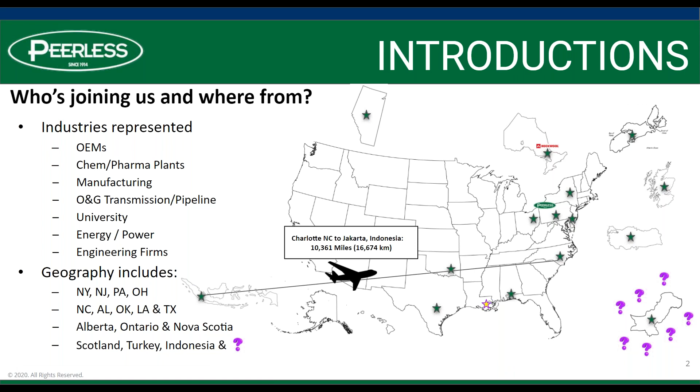Peerless has been around for over 100 years. That's our old building, downtown Buffalo. For years we operated out of a 5-story building. About 3.5 years ago we moved into the building on the lower right-hand corner, where it's much more efficient for us. We can operate far more leanly.

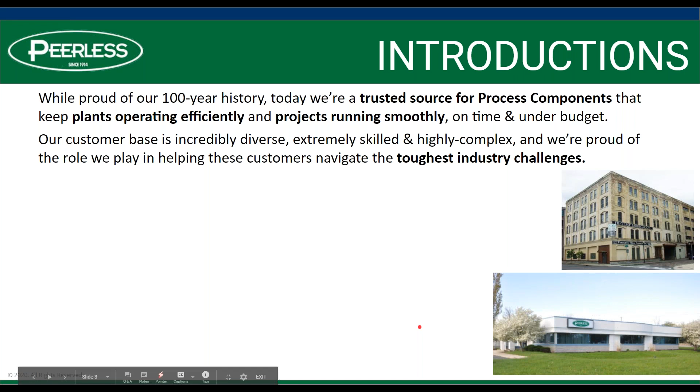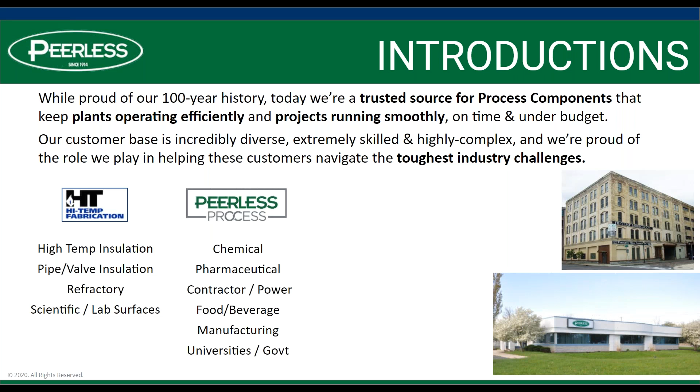We've become known as a relied upon distributor and manufacturer for process components. We operate out of 3 segments: our high temp fabrication group, where we do work with high temp insulation, pipe and valve insulation, refractory, and lab surfaces; our process group, which does a lot of MRO work for the chemical and pharmaceutical industries; and the OEM group, where we work on a lot of very high spec projects that end up global.

Today we have Dave Adamski with us. He is the specifications sales manager for North America for Rockwool. Dave, thanks for joining us. We also have Jonathan Osei-Kaffour, the regional marketing leader. On the Peerless side, you see some familiar faces: Dan Morgan, Greg Barrell, and of course, me.

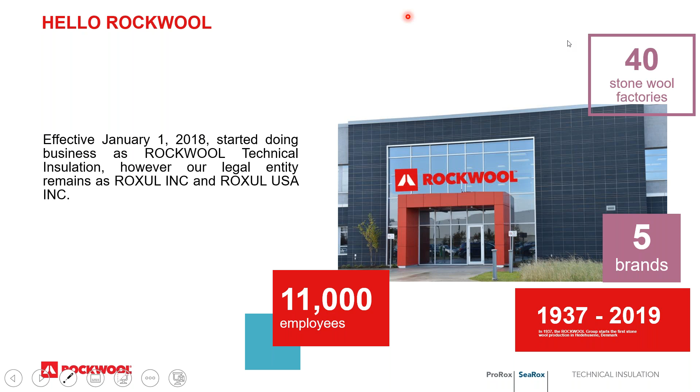Starting off with this slide, at a high level, Rockwool, as we are named today, wasn't always the case here in North America. We've transitioned from this name from Roxul in 2018 to align and bring cohesiveness with our global company in Denmark, the Rockwool Group. A bit of informational points regarding the Rockwool Group is that we employ a little over 11,000 people globally, and we have 40 factories globally as well that serve 5 different brands across multiple industries, all using the power of stone as the critical raw material. The company started in the 1930s in Denmark, which is still the home of our headquarters today.

If you can go back to the slide before regarding North America. In North America specifically, we have 6 factories. Our newest one is being constructed in Ranson, West Virginia, and is set to be online in 2020. Grand Forks is the factory where we produce most of our Mandrel wound pipe sections with WR Tech, which Dave will cover a little bit more in his presentation today. Going to the next slide.

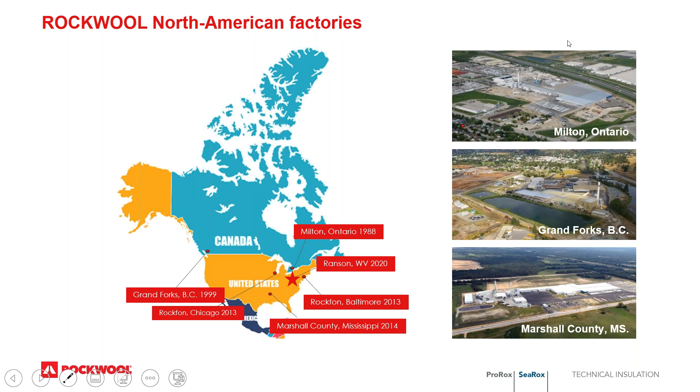So Rockwool Technical Insulation, we joined the Rockwool Group in 2004 to focus a little bit more on the industrial side of the business. So we're a bit smaller, but a focused segment that focuses on the business of process and marine and offshore.

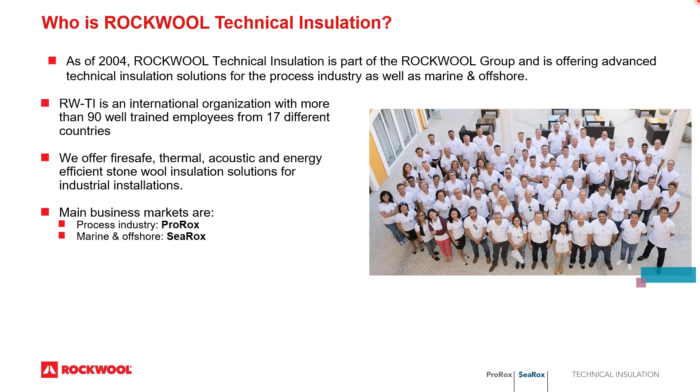If you go to the next slide, I just want to talk a little bit about why to choose Rockwool. We like to showcase this slide specifically to just show the landscape of our customers that we work with, from global owners to global engineering, procurement, and construction companies. So we've worked with pretty much everyone. We're a tried and true company, and we've been here for a while and have a proven track record.

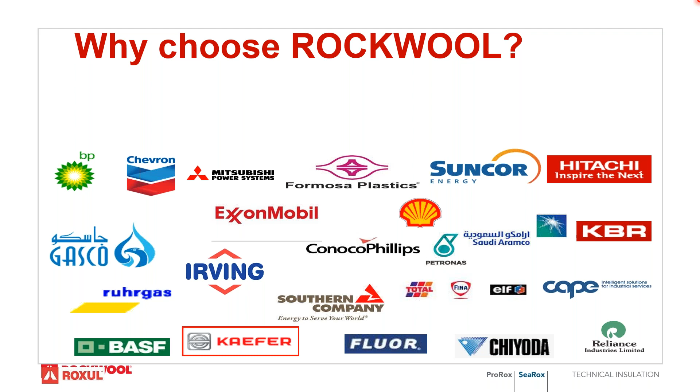Today's presentation is about reducing total cost of ownership with a focus on CUI, as it can be a big part of maintenance budgets. First, we'll talk briefly about why insulate at all. Then we'll go over CUI, or corrosion under insulation, but forevermore you'll know it as CUI, and some methods on controlling this form of corrosion. We'll review what to look for in choosing an insulation. Also, we'll look at some tools outside of the insulation that can help manage water ingress and egress. Finally, we'll wrap up with some valuable resources you may not be familiar with for developing your own maintenance and inspection programs. So, total cost of ownership.

When we talk about total cost of ownership, the expenditures can be grouped into 2 main categories, CapEx and OpEx. CapEx being capital expenditures and OpEx being operational expenditures. Most owners are well aware of the CapEx costs associated with design and installation. However, with OpEx, costs are more complex and they're just oftentimes harder to decipher.

We have energy utilization, impact on production rates, there's carbon dioxide emissions people have to worry about now, waste, and then of course, corrosion under insulation. We've been hearing from a lot of owners that a big portion of maintenance budget is dedicated to CUI. It can represent up to 40% of their costs.

So we recognize that CUI is a large piece of the total cost of ownership puzzle, and this is why we want to focus on unpacking what is CUI and some methods that are currently being used to deal with corrosion. Our aim is to offer some light and suggestions on what owners can do in the design and installation phase that will hopefully reduce some of those maintenance costs down the road.

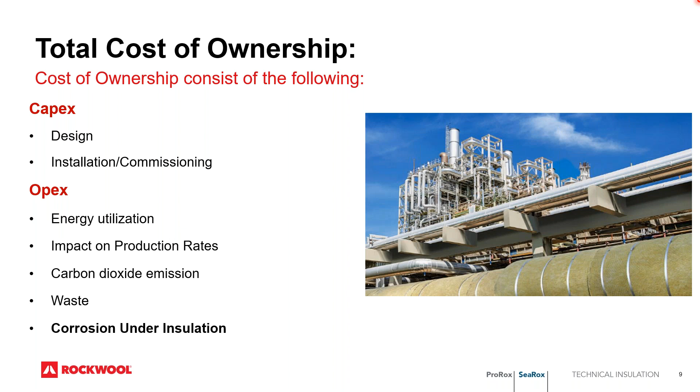Before we get into it though, let's look at why insulation is necessary in the first place. Most owners and engineers are well aware, but since the audience is wide and at different levels of understanding, I just wanted to answer the easy question first. Why do we insulate? So why not just simply get rid of insulation if you're having a corrosion under insulation problem? We'll look at a few ways to answer this in the next few slides. But the first way I'd like to answer this would be to look at an example.

Let's look at refineries in Europe. Approximately 5 to 10% are either poorly insulated or not insulated at all, which results in heat losses corresponding to, this is a lot, 150,000 barrels of oil per day. And if we just take a cost of even $40 per barrel, that translates into $2.2 billion a year of loss. These losses could be prevented with a simple investment of $600 million.

And you know what? That gives you a payback period of less than 3.3 months. So with an investment of $600 million, you can save $2.2 billion. That's a pretty serious return on investment. So again, why insulate? Because it simply pays to insulate. The savings are hard to ignore. In the next slide, we have an interesting case study of where an owner chose to remove the insulation, but it didn't turn out the way they had planned.

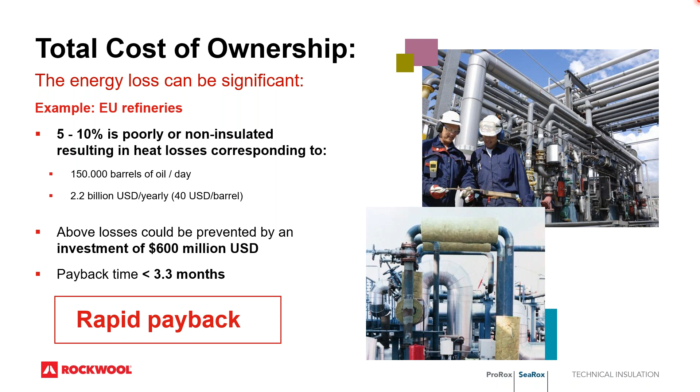So here's the situation. Removing insulation to mitigate corrosion under insulation is not the way to go. So we have a storage tank. They removed the insulation, then they coated it with an insulative paint, 7 layers. Total thickness, approximately 3.5 millimeters thick, which, sorry about that, that's about 1/8 inch. Tank diameter is 12.5 meters, height is 16.5 meters.

The heat loss from the tank wall, and it's tank wall only, so we're not even factoring in the heat loss from the roof. And then using the 80% filling degree, tanks filled to approximately 80% of their capacity for expansion, we end up with 330 kilowatt hours. The annual heat loss, well, you run the plant for 6,000 hours, you're at 2 million kilowatt hours. At 0.06, this is in euros, you're dealing with 120,000 euros per year of loss. This is what's going on because of the cost of heat.

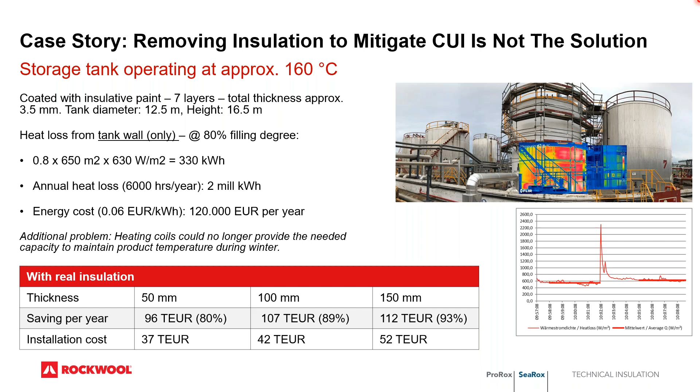Well, if we insulate, even if we put 2 inches or 50 millimeters, the savings are 96,000 euros, or 80% of the 120,000 euros per year. The installation cost of that is approximately 37,000 euros. Or if you go to the other extreme, you go to 150 millimeters, approximately 6 inches. The savings are 112,000 euros with an installation cost of 52,000. So again, as we said in the earlier slide, it pays to insulate. It saves us considerable money in our facilities.

The case study demonstrates how a simple solution such as insulation can have a dramatic effect on the cost of ownership. Here are some other reasons why owners come to us. They ask us to help them with issues related to, of course, cost of heating, process control, frost protection, CO2 emissions. Then there's safety. We got fire protection, we got personnel protection, and then acoustics related to noise control.

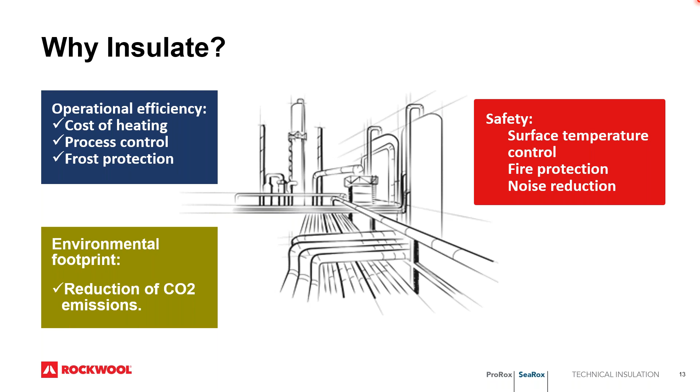Insulation checks off all these boxes. It's quite versatile and can fit so many ways of helping control the cost of ownership. So our topic is corrosion under insulation, and as said, you will now always know this term CUI. Insulation has a lot to offer, but with that comes specific challenges, namely CUI. In this next section, we'll go through some stats and some facts about corrosion.

A study done by Exxon estimated that 83% of CUI incidents happen on pipelines. Aging facilities are affected by erosion, corrosion, and fatigue. Up to 50% of the safety hazards are caused by pipe leakages or ruptures. Damaged insulation not only poses a risk for CUI as it's a source for water intrusion, but the heat losses can lead to major loss in efficiency and money. You may be already aware of this stat, but NACE did a study in 2016 that pegs the global cost of corrosion to $2.5 trillion per year.

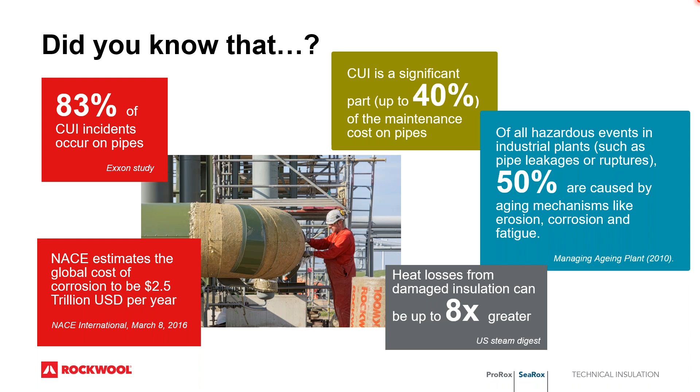So what exactly is CUI? Well, if I could be really simple about it, I'd just tell you it's rust. It's caused when water intrudes into the system and gets trapped between the insulation and the unprotected surface of the pipe. Rust is an oversimplification, but for visual purposes, if you can understand rust on a metal surface, you're on your way to understanding corrosion under insulation. And of course, water and moisture come from a variety of sources, whether it be rain, condensation, washdowns, maybe you're cleaning up the area, and then of course, just simple leaks or spills in the process.

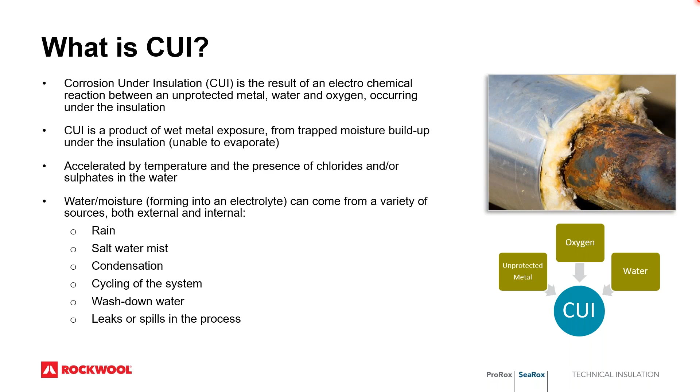And of course, accelerated risk areas are any facilities that happen to be near coastal areas, because salt water helps accelerate the corrosion, or high humidity areas. And of course, as mentioned, if you happen to have a cycling facility, that puts us into a new extreme as far as what we need to concern ourselves with corrosion under insulation.

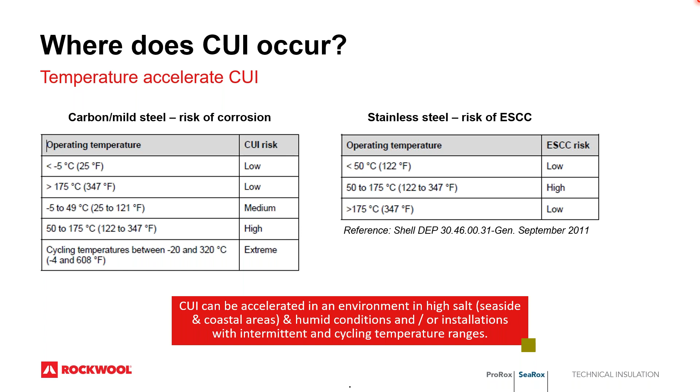So CUI is a challenge for sure. There's many factors involved. You got to consider the surrounding environment for sure, not to mention just what is my plant actually doing. There's the equipment and the system design. Then of course, choice and installation of the coatings that you would maybe put on the surfaces of your pipes, definitely the insulation. And then as a protective area, you got jacketing and cladding to consider. Then finally, you really got to look at inspection and maintenance so that you can spot where some vulnerabilities may be.

It's a costly problem due to more frequent repairs. So when you're looking at CUI and you're looking at your maintenance budget, these things all contribute very quickly to the cost of the maintenance of the plant. And then when it comes to your safety program, CUI, when we talked about ruptures and spills, of course, that can add to personnel problems where people can get hurt quickly. It can put you at risk of fire, and not to mention just simply pollute the surrounding environment.

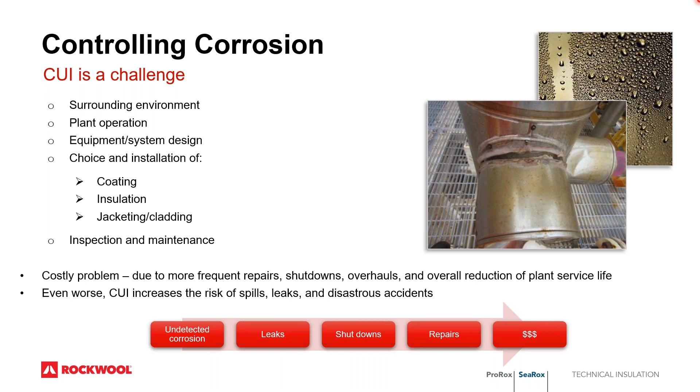With the equipment design features, with a lot of engineering here, we can do things that can help physically manage for reducing CUI. So of course, in doing your equipment designs, we look for things such as areas where water can be trapped, or make sure we have smooth surfaces for water to quickly shed. And then, of course, you design your systems so that we can literally prevent water getting into the system at all.

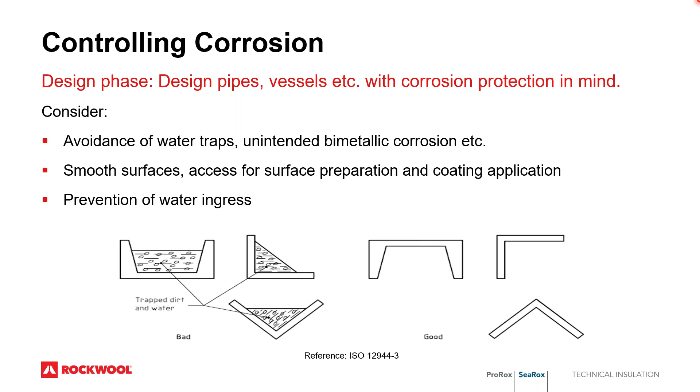Material selection and installation. Properly designed and installed jacketing, cladding system, that's your first line of defense. Use of suitable coatings on the system for pipe surface protection. And we will get further into these as this presentation goes on. So if any questions are starting to rise in your head, I'm hopefully going to address them as we proceed here. And then, of course, choosing an insulation material is very important. It has to have corrosion reduction characteristics.

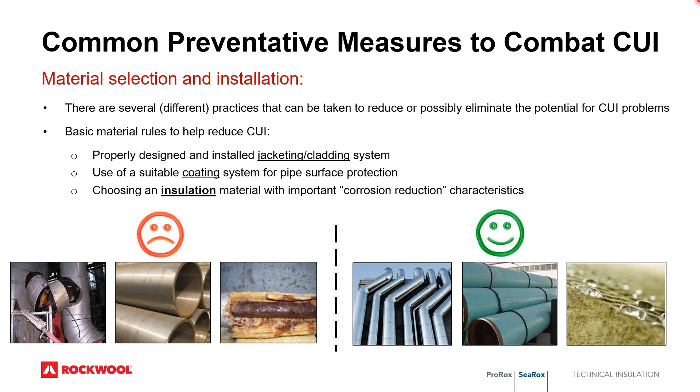And like most facilities or any process situation, quality control is paramount to ensuring that all things are working together to prevent the single problem you're trying to prevent, and in this case, it's corrosion under insulation. So QA programs will help monitor the whole process.

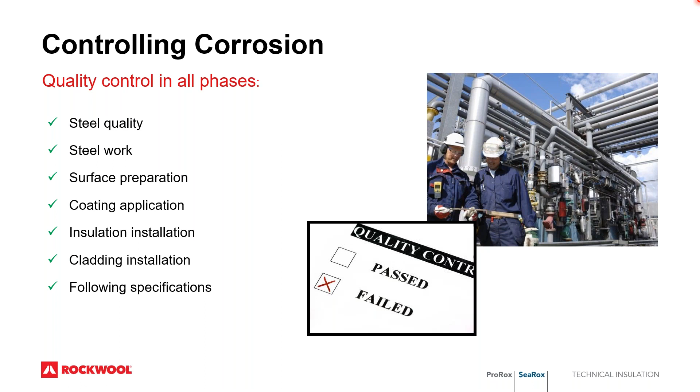Then throughout the QA process, you can come up with inspection and test plans, and proper equipment care, so that with inspection and test plans you can come up with prompt and effective maintenance. You can assess risk-based inspection procedures, and then with proper safety protocols in place for care of equipment, you avoid the foot traffic and any other unnecessary activities that may damage the system.

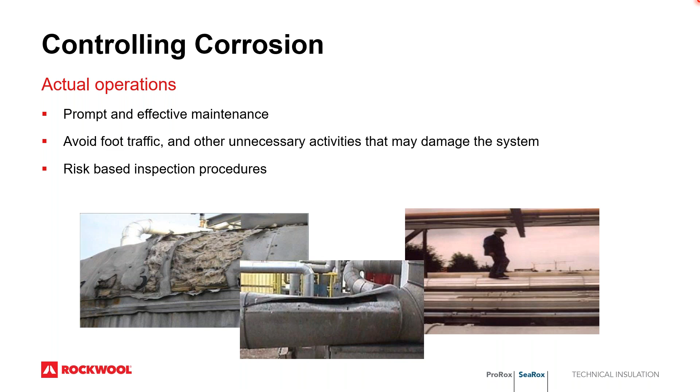So then you've got choice of coating. Now, this particular chart you see in front of you references the NACE SP0198 2016. And when I speak of coatings, I'm talking about an actual coating that goes on the surface of the pipe steel or tank, as you see in the pictures, that allows for protection against sitting moisture on the surface. This puts a barrier between sitting moisture and the actual metallic surface.

So NACE has outlined specific procedures for dealing with surfaces at various temperatures to help mitigate the corrosion situation that we often face in these facilities. So of course, your coating system should be suitable for the operational temperatures, so you've got to check your coatings. Surface preparation is critical. And then of course, once it's all coated, you do have to avoid damage of the coating after application. So all these things can be factored into an inspection and test plan in relation to controlling CUI.

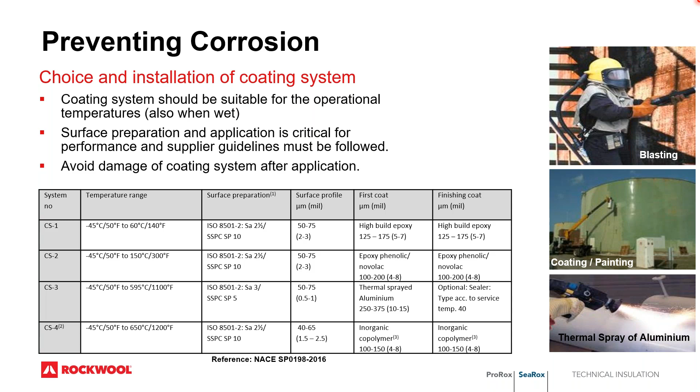So what about the insulation material? Rockwool has done a lot of research based on what NACE says in their CUI guide, and I'll do my best to give you a high-level summary of our findings. The full findings for this are available in white papers on the NACE website. So the insulation material. As a major insulation manufacturer, Rockwool, we recognize that we have a role to play in the CUI issue, and we're in a unique position to help solve the problem.

It's an industry problem because CUI is not unique to stone wool. Corrosion under insulation of carbon and stainless steel is possible under all types of insulation. The most influential characteristics of insulation are water repellency, permeability, as well as water leachable salts, such as chlorides or sulfates, and other acidic elements that can accelerate corrosion.

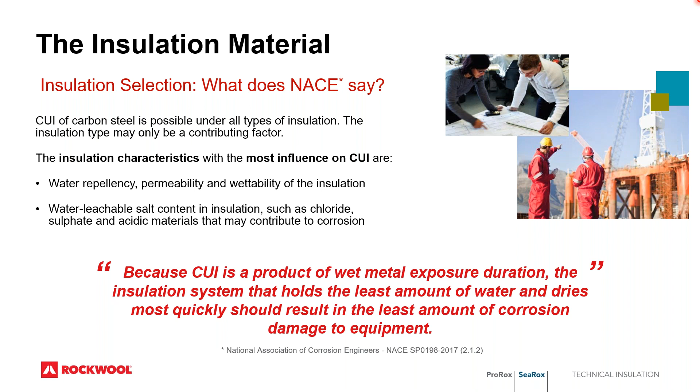This is best summed up in a statement within NACE's SP0198 guide on CUI. And it reads: because CUI is a product of wet metal exposure duration, the insulation system that holds the least amount of water and dries most quickly should result in the least amount of corrosion damage to the equipment. So what NACE is basically saying here is reduce time of wetness and you should reduce corrosion.

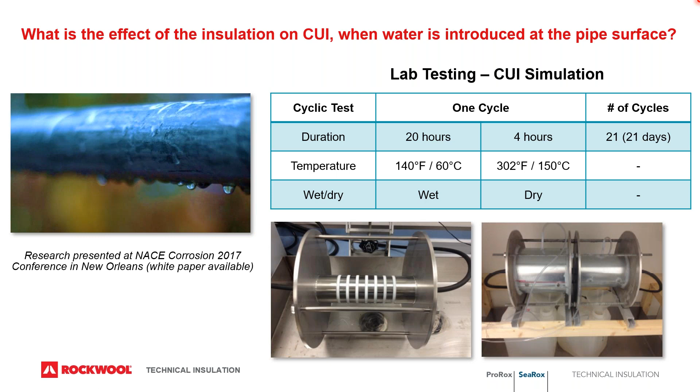The test rig is exposed to a wet and dry cycle. You get 20 hours of wet, and then we allow for a 4-hour dry. We did this for 21 days to find out what would happen. And so here are some of our key findings as we look at these images of corrosion on the top and bottom sides of the pipe. The insulations that leached out higher levels of chloride and sulfate resulted in more corrosion.

Larger areas of corrosion are found under closed cell insulations versus open cell insulations. That'd be a good question for someone if you don't know the difference between closed cell and open cell. This directly corresponds to NACE's statement on drying out the fastest. With closed cell materials like PIR and cellular glass, water had a hard time escaping, whereas open cell material allowed for that vapor to escape from the pipe surface through the insulation, thus lowering the time of wetness.

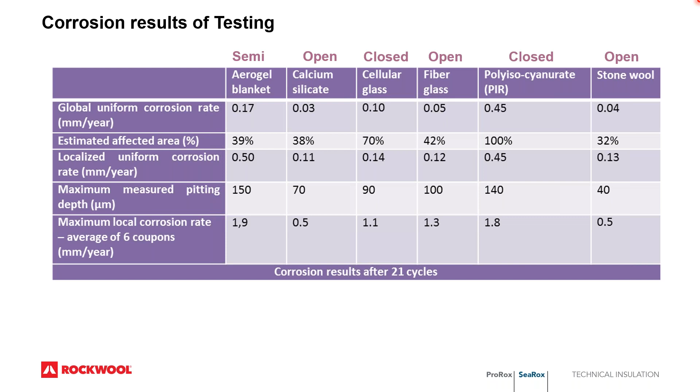This test and these results are detailed in a white paper we presented back in 2017, known as paper number 8877, titled Cyclic CUI Testing of Insulating Materials, for those of you interested in digging into this further. For NACE members, this paper is available and free to download. So for the person who asked that question, if I was not clear, please ask it again so I can review it one more time.

So what do tests show? Corrosion is directly related to time of wetness. Less water and faster dry out equal less corrosion. The ASTM G189 testing and results presented in the previous slides looked at the drying out time part of the equation.

The ASTM test is similar, but it's actually designed for flat specimens, so that's fundamentally the difference between the two tests. The EN standard is specifically designed for pipe-shaped insulation, whereas the ASTM standard is designed for flat insulation. In the ASTM standard, we submerged it to a depth of about 1 inch for 2 hours, and measured the water absorption at a recovery time of 2 hours and 48 hours after wetting, to see how fast the insulation recovered.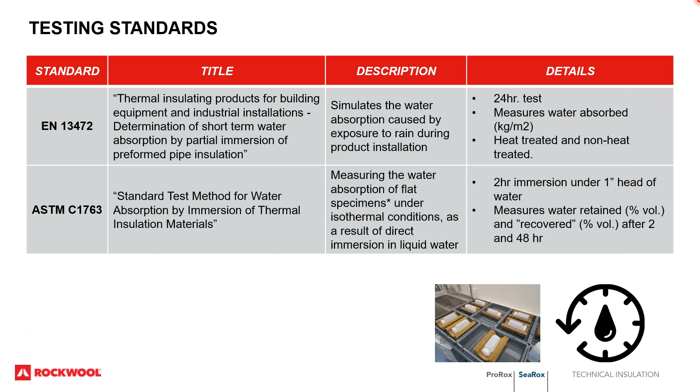You may be wondering how this test differs from the previous G189 test. Well, this test only looks at water absorption into the materials, whereas the G189 test looked at water escaping. So that's, again, back to the closed cell versus open cell comparison. With the G189, we can see how fast water could escape through the different cellular structures of the insulation.

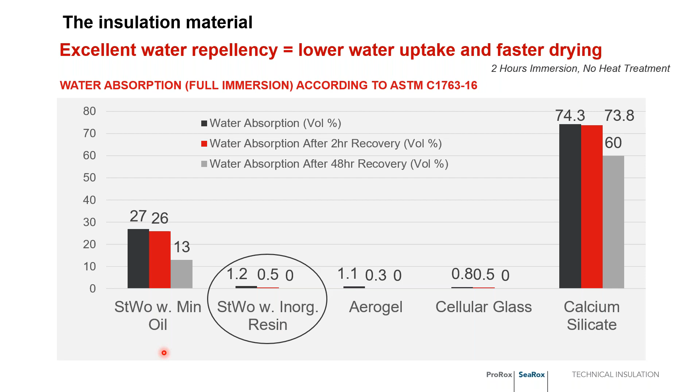So once again, another key aspect of keeping water out is the thermal durability of your water repellent treatment. Inorganic resin versus mineral oil are called water repellent treatments. This graph details results of stone wool and other insulation materials before and after heat treatment. By heat treatment, we simply mean the insulation was put into service and had to perform thermally at a temperature, and we wanted to see the result of the added water repellent treatment.

We did this treatment at 250 degrees Celsius for 24 hours. The reason for that is we're really interested in how the material performs in applications where the CUI risk is high, and remembering from the earlier slides, that's the zone between 50 and 175 degrees Celsius. For this comparison, we used the EN 13472 test, which is a partial submersion test of our insulation for 24 hours. That's meant to simulate short-term water exposure like a rain event, and water absorption is measured in the weight of water per submerged area, kilograms per meter squared.

As you can see, stone wool treated with inorganic resin performed well with less than 0.2 kilograms per meter squared before and after heat treatment, similar to perlite, which also had a low amount of water absorbed. But as you will notice, stone wool treated with mineral oil did not perform so well after heat treatment. When it was put into service and heated up, it began to hold the water. Calcium silicate was not so great in water absorption before or after the heat treatment test.

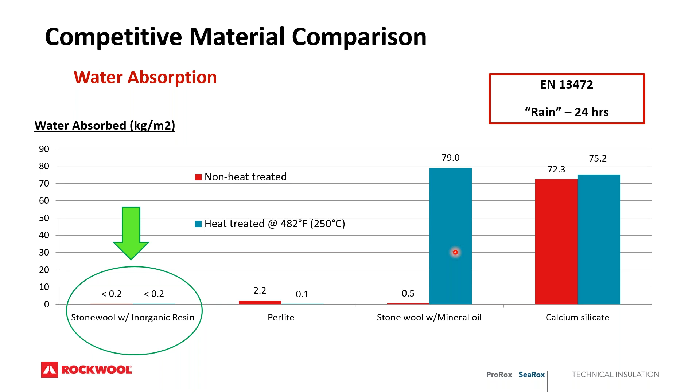We do have a paper that goes deeper into this subject, which I would encourage our viewers to look up. That's paper number 10929, titled Mineral Wool and Water Repellency.

As a little bonus feature, we can look at something we often get asked about: are these additives actually safe for coatings and in applications like paint shops where coatings are critical? Insulation materials and the additives that are part of the insulation can affect coating operations. We conducted a series of tests in accordance with the VW, or Volkswagen, paint test, whereby additives are leached out of the insulation by a solvent and captured onto a piece of copy foil. These foil samples are then coated with varnish to test for a negative effect.

On the right are pictures of stone wool with different additive types being tested. The mineral oil caused poor paint adherence. With the silicone oil, you'll notice some fisheye effects as well as poor paint adherence. With inorganic resins, there are no visible defects even when zoomed in. If you happen to notice a difference of color in one slide, that's just based on the camera lighting as we zoomed in, just in case that was a question that may come up. So we are confident that inorganic resins were indeed safe for coatings.

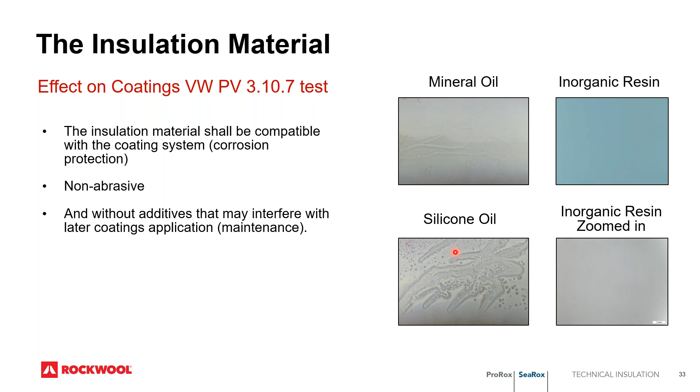First question, if you agree now is a good time: you were talking about the water repellent additives and how they perform. I believe you took it up to 250 degrees C. Do you have data on what happens to those repellents at temperatures above 250 C, and what sort of rates you might see at those temperatures?

Do we have data on that? I need to verify that for sure, because our data and our tests were simply in the range of the highest situation of corrosion under insulation. At 250 C, which off the top of my head is around 480 degrees Fahrenheit, that starts to take us out of the high risk area of corrosion under insulation and into a whole other process situation of high temp insulation.

So our inorganic resin does have an upper limit before heat eventually can cause it to be ineffective. At that point, we start to talk about a whole other mitigation process for controlling water ingress and egress. So to answer the question: does the inorganic resin have an upper limit? Yes. Do we have data that shows what happens after that? I would need to verify what data we do have available, because I'm not entirely sure we went through the process of what happens to water at high temperatures in relation to insulation. That I'd have to get back to you on for sure.

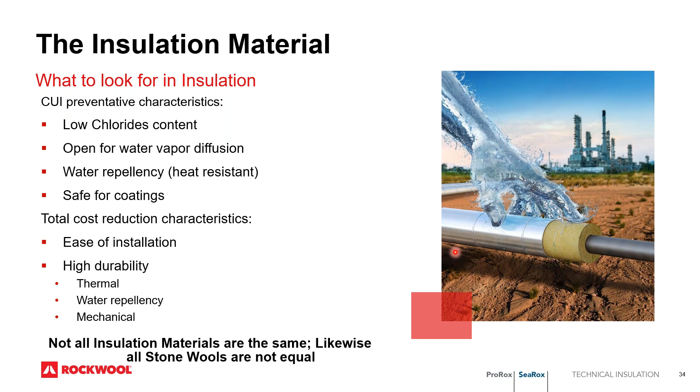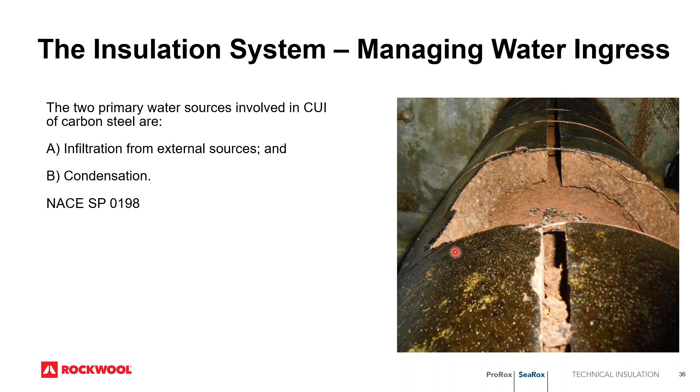So now that we've looked inside stone wool insulation and what to look for, in this next section we'll take you through the insulation system as a whole and describe some additional accessories to consider to help manage water ingress and egress. Outside of the insulation process, you're basically going to be dealing with water that comes from the outside via leaks, or you're going to be dealing with condensation.

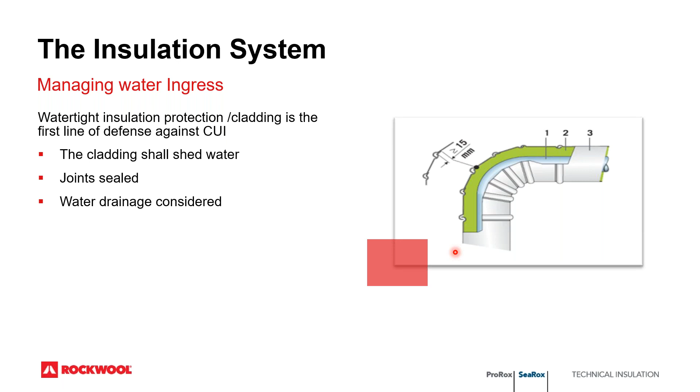Cladding is your first line of defense. Cladding is simply the exterior jacketing put in place for the protection of the insulation and the underlying system. Jacketing or cladding has its own selection criteria, from aluminum to stainless to galvanized, and that's a whole other presentation. And of course, you have your design.

Piping systems have vulnerable points for water intrusion: supports, hangers, and joints. It's important that you consider these things when you're thinking about water ingress into your system. Is something going to penetrate to the pipe, such as a pipe hanger? Or are we going to be running over a surface such as a pipe support? We've got to make sure.

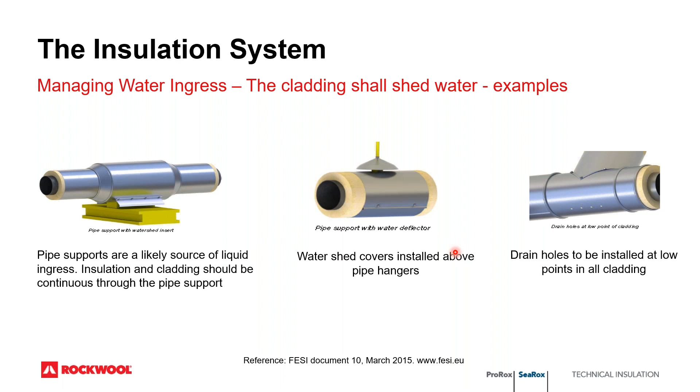And then of course, if you know water is going to be coming into the system at some point, you can have drain holes installed so that at the lowest points, they can drain out.

Then of course, you've got accessories for shedding water. You seal your joints with tape. You have other types of sealants such as silicones. And then of course, rain hoods above your hangers so that when water runs down, it can shed away from the penetration into the insulation.

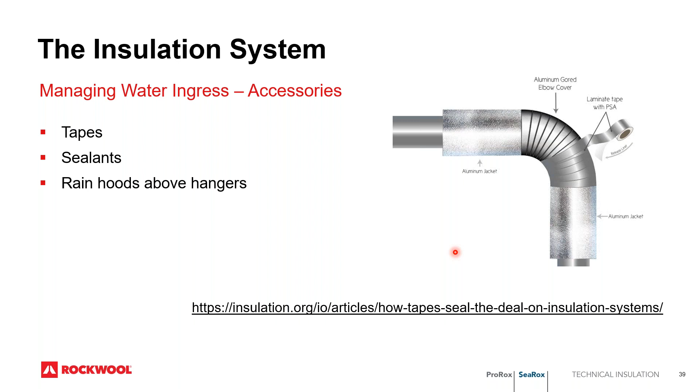And then you have some mechanical systems that can be added to the pipe design that will help with water drainage. You see in these pictures methods of separating the jacketing itself from the insulation, or separating the insulation itself from the pipe, so that it allows any water that penetrated the system and gets to the pipe, or water that has evaporated to the outer surface of the jacketing, a free flowing area to escape, possibly through drain holes.

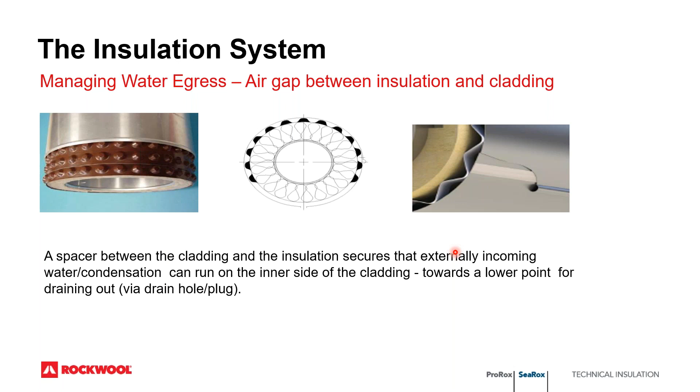As you see here, reduced time of wetness will lower corrosion. In this illustration, you can see how water's got into the system, and then over here you see the evaporation process of the water migrating out to the outer jacketing surface. It'll condense against the cooler surface and of course drain out through the drain holes.

But with these collars that can often be engineered in, they keep the insulation away from the pipe itself. So the insulation then has a way of being separated from the standing water as well, and also allows for gravity to pull it down the pipe towards a lower lying area for quicker exit.

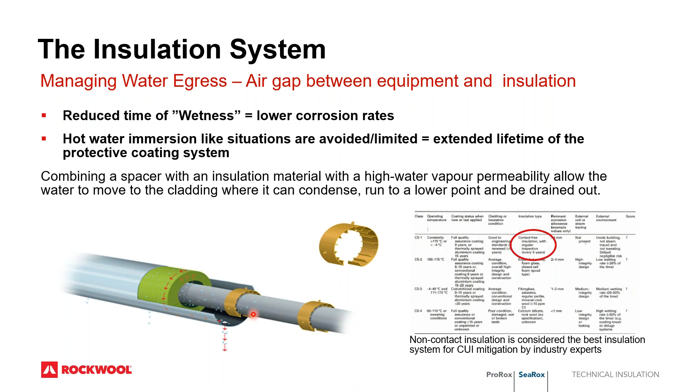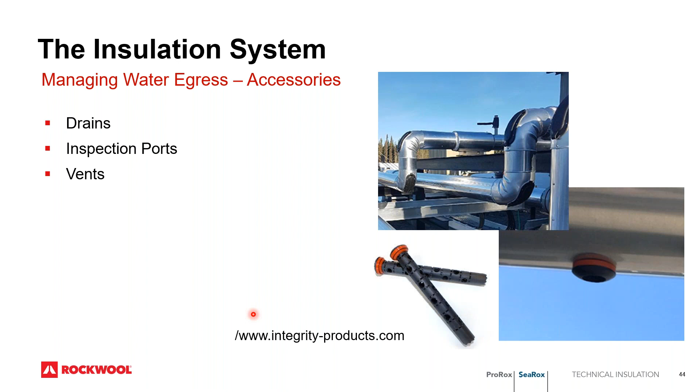And then of course we get back to this idea of inspection and testing. So you can add into your system drains, inspection ports, and vents — inspection ports to go and see what's happening under the insulation. Vents simply allow for the opportunity for venting, and of course drains, drain. So these types of accessories are all part of the system that can be engineered in to help mitigate corrosion.

So, inspection and maintenance.

In this final section, we'll introduce some resources owners can use for their inspection and maintenance procedures. Maintenance should follow a risk-based procedure. Knowing where to allocate resources will help maximize your maintenance budgets.

So these types of solutions simply run a probability versus consequence analysis, where you can say: is the system a high probability of corrosion? And if I take that and say, if corrosion happens, what is the severity of the consequence? So if you have a high severity, high frequency of corrosion, and the pipe should burst, you can suffer significant environmental damage, well you would rate that a 9 and say we need to focus on a maintenance inspection plan for that.

And conversely, if it's in an area with very low chance of corrosion anyway, and the consequences are minimal, then you would say, I'm not going to allocate as much resources towards inspection and testing. This all contributes to managing the cost of ownership and getting there the most successful way. You can also take this strategy further by using a chart like this.

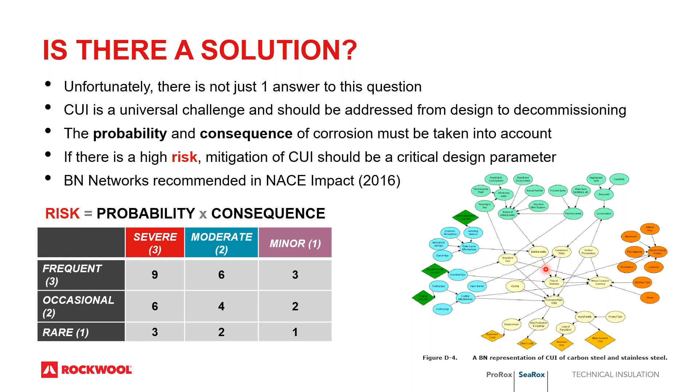This chart simply draws connections leading to the same outcome, meaning what is the highest chance of corrosion and the net consequences if we do not pay attention to it. This chart looks more difficult to analyze, but it factors in significantly more variables for you to consider. Either way, these methods are great tools to solve the intricate problem of corrosion under insulation.

Finally, a couple resources to take the process further. The insulation industry, like all, is suffering from a dwindling knowledge base, because the older generation is retiring and leaving the workforce. I can't speak specifically for Peerless's recruitment process, but within the insulation world, a lot of students aren't coming out of university looking for that first insulation job. So we have to do some things to reinforce the knowledge base within our industry.

NIA, the National Insulation Association, has put together a thermal insulation inspector certification course. There are also inspector programs in Europe like FROSIO. The aim is to mimic the rigorous inspection standards of coatings and surface preparation. So if you're adding to your knowledge base, NIA has a couple courses to go for.

For those of you who don't even know a program like this exists, there are associations actively trying to advance the industry and bring up the level and quality of insulation, not just for manufacturers, but for distributors and installers too. Quite honestly, what Peerless is doing today is all part of increasing that knowledge base within our industry. It's constant learning, constant investigation into new things happening out there. How are other people solving the problem? What is our best way forward?